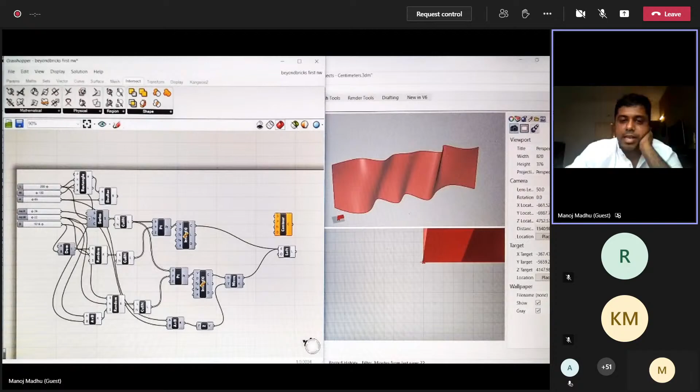So we went to our good friend Rhino with the Grasshopper plugin. We wanted to create some shapes using bricks as modules. So we did a lot of YouTubing and worked out a few algorithms, and we came out with a system where we can give an image and create the depiction in brick. Brick becomes one of your modules, and using this system we were able to generate any kind of shape if we upload a grayscale image. So this is basically the flowchart or algorithm.

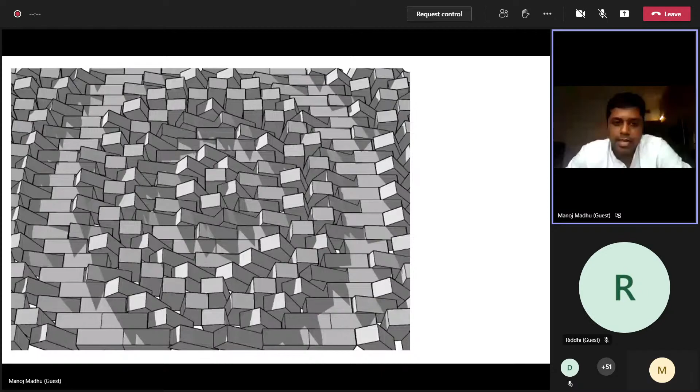So we created the whole system, and we wanted to create a ripple effect because there was a stream nearby, and we wanted to showcase the whole point of monsoon, as we call it. So water and all - we tried to create a ripple effect. We used brick as a module and loaded it into Rhino, and we got the whole image out. So this is the kind of image that we got out of Rhino, with a shadow effect added.

Then what we did is we took the whole module out, and we had each course laid out, knowing the position of each brick and the angle each brick had to be done at. Then we went into hardware mode with interns who were doing this work with us. Using basically a 15 centimeter scale and a small protractor, and with two masons to help, over a week's time we laid these 26 courses.

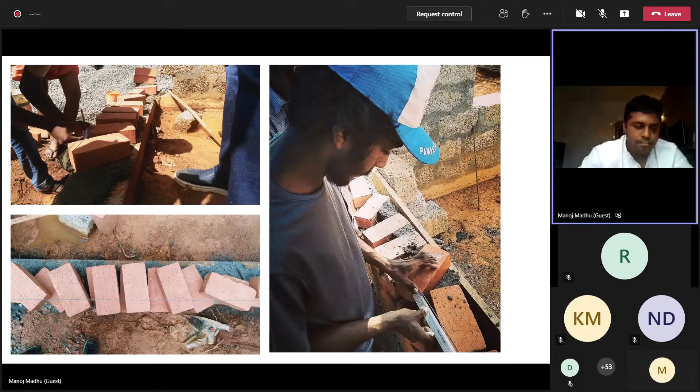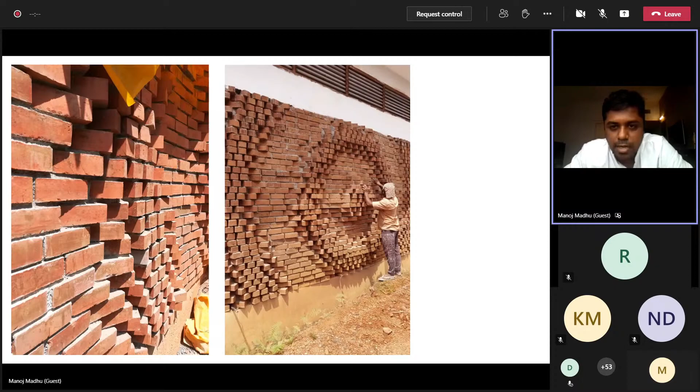And this is how we started building the whole wall. So this is the wall before the basic finish sealant coat was added. This is the raw brick before we had to add a sealant. This is Kerala, so we have to do something to protect it from moisture and moss and all those things. So this was the brickwork that we have done. You can see the painter cleaning up. So this is how it was incorporated into the whole house.

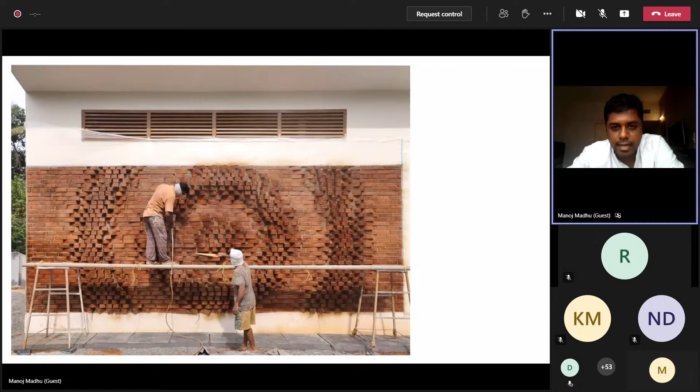So this is where you can see us adding the sealant coat to protect it from the rain, moisture, and all the moss that comes in. You can look at how each brick has been laid and is holding onto a concrete wall at the back. And this is how it came out in the end. So this is one of the options that we have done for a wall.

So I'm just going to talk about this wall here, where what we did is there was this house being demolished nearby. These guys were basically taking the terracotta roof tiles and throwing them away. So we said, give us those tiles. For about 5,000 rupees, we got the whole set of tiles from that house, and we said we'll use it in some way. So this is also a basic idea from what we used to do in Kerala.

So all the tile factories or old homes in Kerala used to make the compound wall using terracotta tile. If you go to a tile factory, there are still tile factories whose compound walls are made of their tiles, which for some reason has been lost, and architects are now looking forward to so-called modern concrete blocks and AAC blocks. So we took that approach.

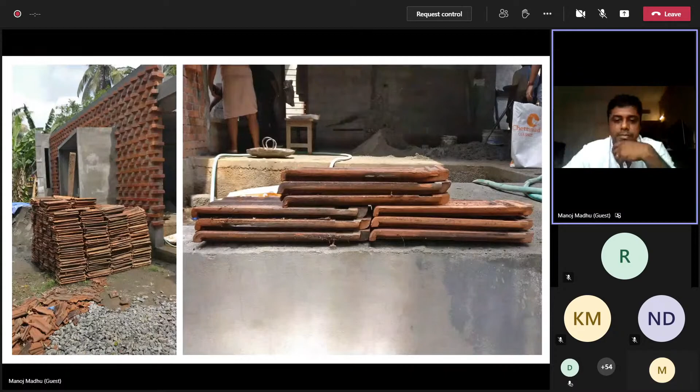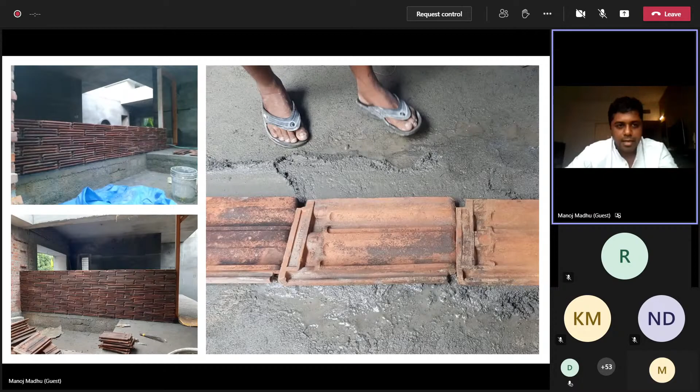So you can see that. We laid one line, then the next line, and slowly corrected the levels using cement mortar in between. You can see our masons working tirelessly.

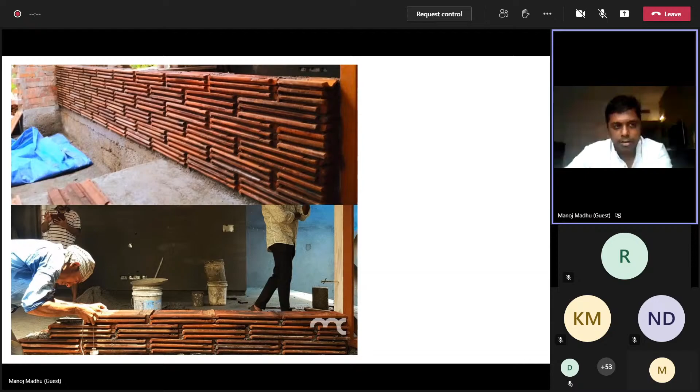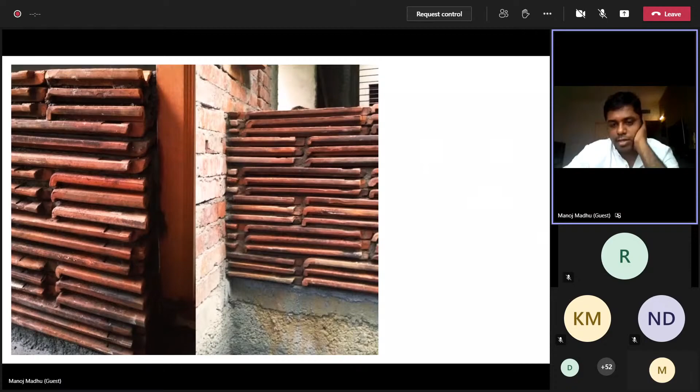You can see the edge where it meets the door. This is the main door, with a brick wall finishing the edge. One side is the teak door, and the other is where it meets the brick wall. The details were worked out so that it doesn't look bad, but still has to look structurally sound. We inserted a small window in between, so even those edges had to be really worked out.

We were thankful to have a nice set of masons there, and my team was there almost round the clock to see this through. You can see how this whole thing was shaped, and this is the final output, where they've been living since last October.

So you can see that old materials could be reused and rethought into a new way that serves the purpose. It's not a load bearing wall - there's a beam that goes up - but you can use this as load bearing too, and it gives a certain aesthetic to the whole house.

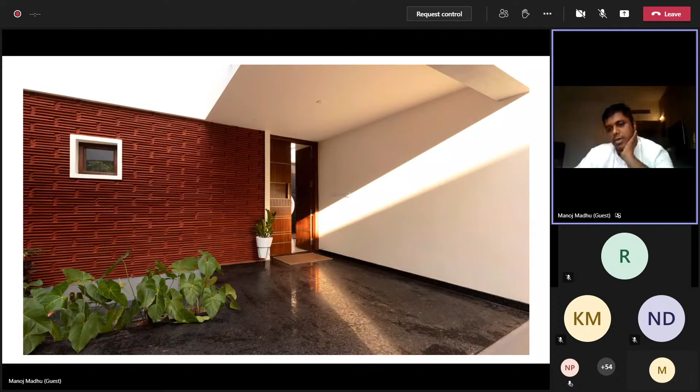So you have the whole small courtyard in the front, and this is how the whole place looks right now. These were 2 examples I wanted to show, of how you can rethink walls, rather than every wall being either a straight wall, a wall with cladding, or a wall with texture paint.

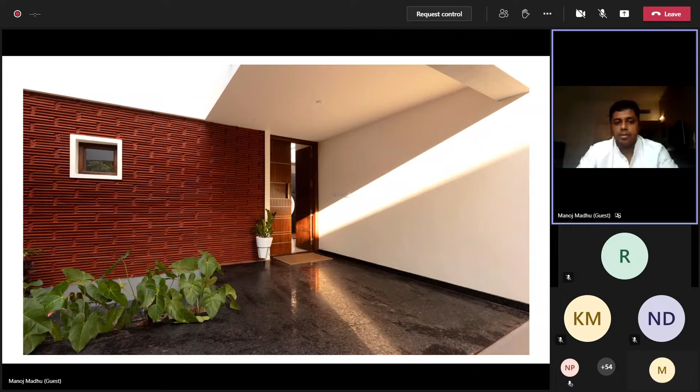Why can't we look at how the wall is actually made itself, rather than it just being blocks or bricks or laterite stone or sandstone? Why don't you relook at how the wall is made, and let that construction methodology speak out and become an aesthetic element, being art, rather than making a wall and finishing it off with wallpapers and texture paint just to make it look good. Why can't a wall inherently look good?

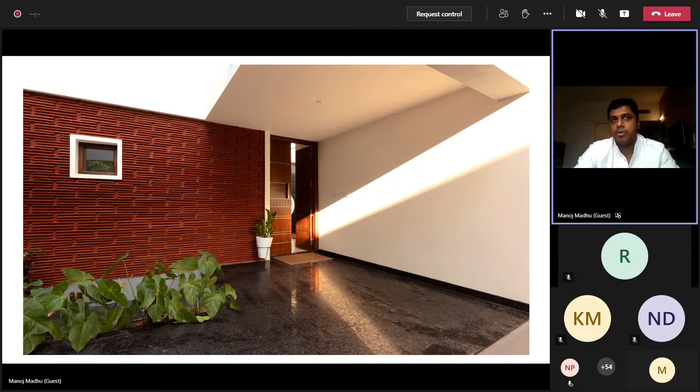Why can't we rethink how a wall is made, and rethink the materials used to make walls? These are questions you can always ask yourself, rather than the architect being someone who just sketches and draws and makes things look good. We should rather enter how things are made - not just in product design or chairs, but in the aesthetic elements of a small thing like a house.

There are so many elements in a house. This is just one of them, there are other elements too. I could run a whole presentation on just this project, as we have about 10 or 12 elements that have been rethought, but I can't go around talking about everything. So these were 2 walls.

Next, I'm going to talk about roofs. Taking from Laurie Baker, there's something called a filler slab, which all of you would have studied. Laurie Baker was famous for doing filler slabs using terracotta tiles. What we did, we took it a bit further - I know Anupama Kundoo has done this using fish curry pots in her project for the Biennale, and even in a project in Pondicherry.

So what we did is we got pots - these are pots used to make fish curry in Kerala, and the smaller ones are pots used for smoking during puja. Along with that, we took parts from scrapyards - vehicles, cars and other things. So what you see are parts of gears, engines, or tires. We added bike chains, which I'll show you, and a couple of glass blocks so we could bring in light from the top.

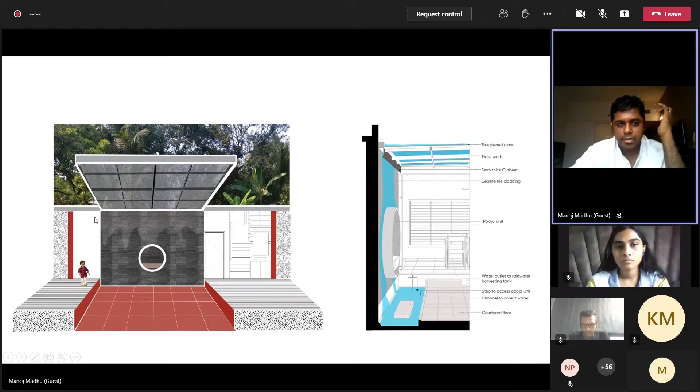So this is an illustration one of my interns did—you can see the courtyard glass here. This white piece is actually metal. So the water comes in, comes here, collects over here, and then you can see the small drain point where the water goes in. This is how it looks from the top. We have a small mesh here so that mosquitoes or any leaves or other things don't come in. You can remove it and wash it—you can see the clips here, there are four clips, you just remove the clips, take it out, and clean it. So all those little details have been taken care of to create that kind of effect.

And yeah, the client is happy—the rain also comes in, light also comes in, it's a central courtyard. So those were two roofs. Again, I'm repeating the whole thing: why can't you rethink roofs?

Again, one of the options was reusing scrap, right? We used old terracotta tiles, parts of vehicles, cars, bikes, whatever it is, and glass blocks from an old project to bring in light.

Now this is another one. This was a balcony that was supposed to be made for a house. They wanted it to be safe, but they also wanted the wind to come in. We didn't want to do the usual - you always see the standard louver system, or a large grill, or a jali. So why can't we rethink it? But again, within a budget, we didn't want to use wood, because the whole sustainable idea was there inside.

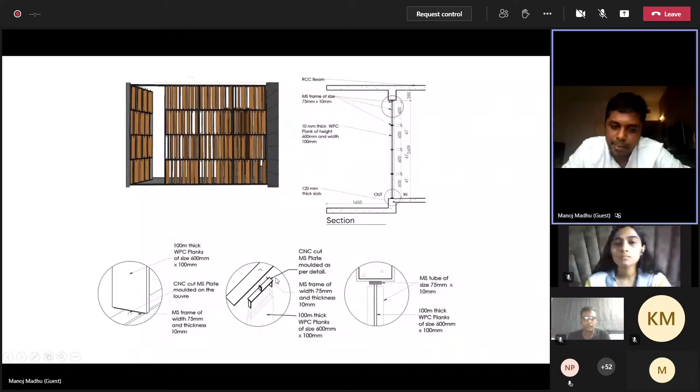So what we did is we used something called WPC planks, which is pretty cheap. The whole system, one WPC length, comes under 2,000 rupees - not even 2,000, less than that. So we cut into it, made these small little pieces in an MS steel structure, and did this in CNC cut.

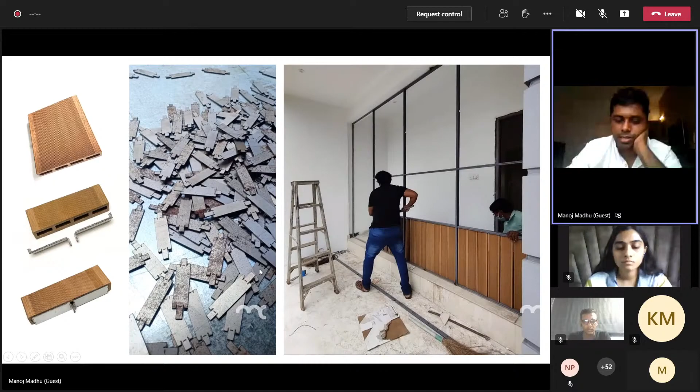So this WPC always has this whole cavity here. We made this whole MS frame - as you can see here, there is this MS frame, and made a small hole in the MS frame, and inserted these fellows there. So you can see that MS frame, one hole, and the WPC frame being inserted.

So the last one - this is the window in our studio as such. This is one that got us multiple national level awards as well. I'm a huge Game of Thrones fan, apart from the last season of course. So the whole idea sparked, I think in season 5 or one of those, when I was watching the titles - this whole idea for this window sparked.

So this is the window - you have 3 squares that rotate on different pivots. I'll just go through it. Normally when you look at a window, you can open it horizontally, or vertically, or pivot it horizontally, or pivot it vertically - the usual thing. But why can't a single window do all these things? That was the question we were asking.

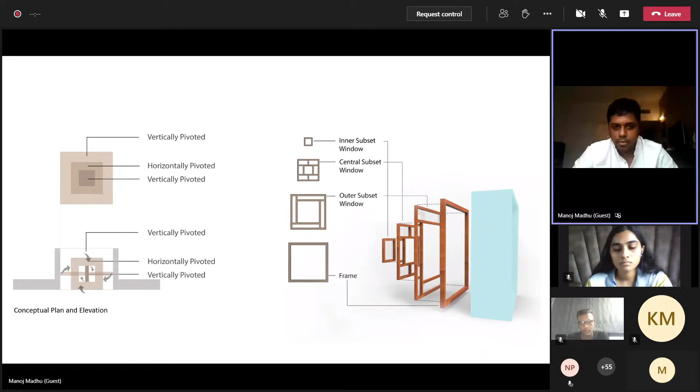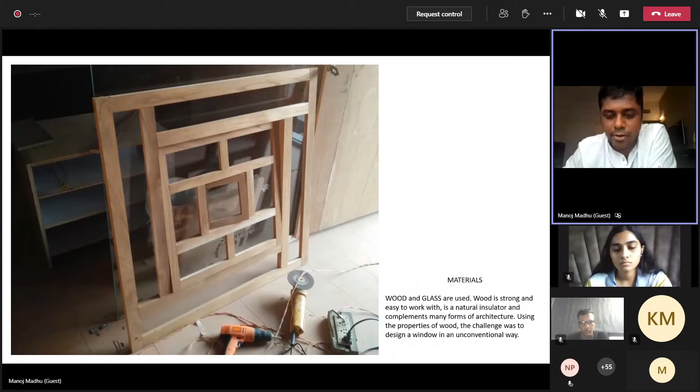Now the thing that happened unknowingly or unintentionally was we have strong winds - this is the western side, so we have winds from the southwest. So when the wind comes in, this rotates really strong, really vigorously, this whole Game of Thrones window. And you have a western sun post lunch, so there's really nice glare and shadows being created by this window, which go on to make shadows in the whole office itself.

So what I'll do is I'll just show you a video. Just hold on.